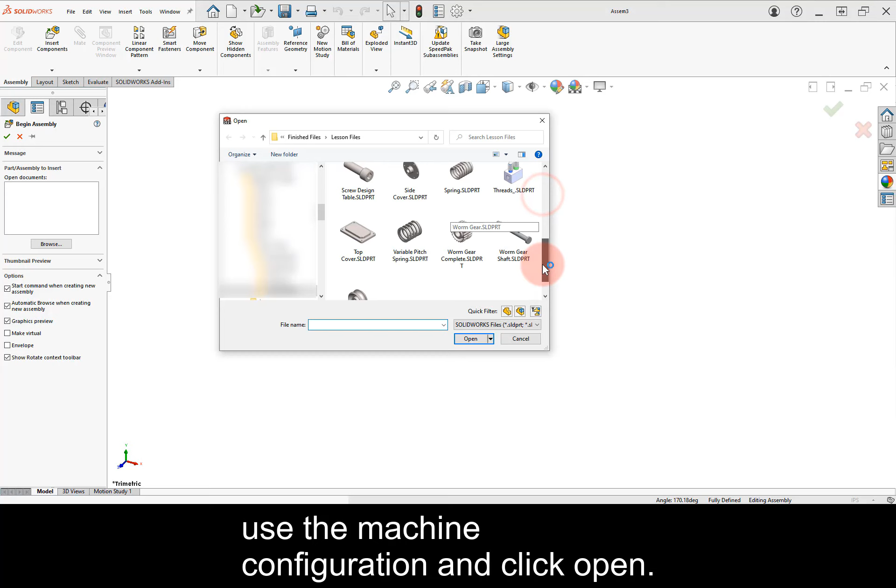Click on New Document, select the Assembly template and click OK. In the Open dialog, select the housing part, use the machined configuration and click Open.

Click on Hide Show and make the origins visible. Locate the housing at the origin and hide the origins to continue.

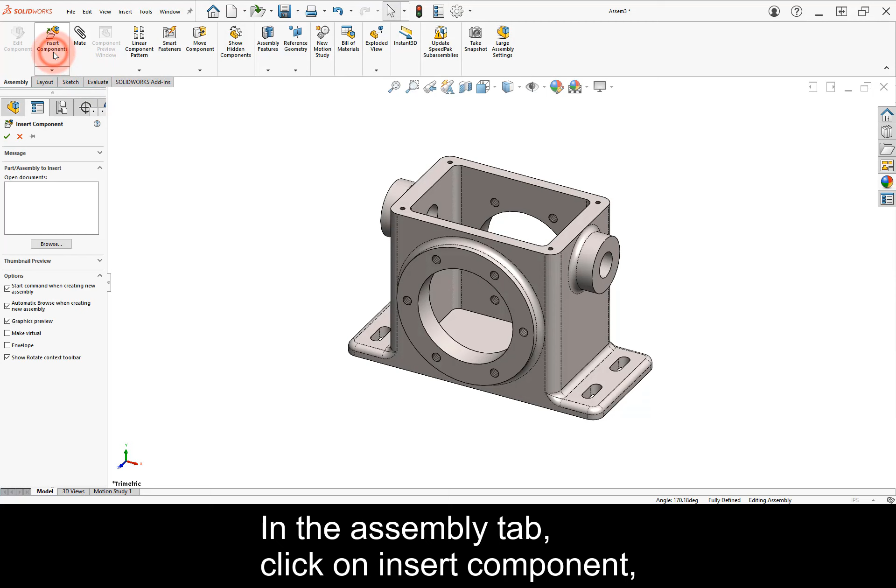In the Assembly tab, click on Insert Component, select the side cover, use the machined configuration and open it. Click in the screen to add the side cover to the assembly. Click and drag to locate it if needed.

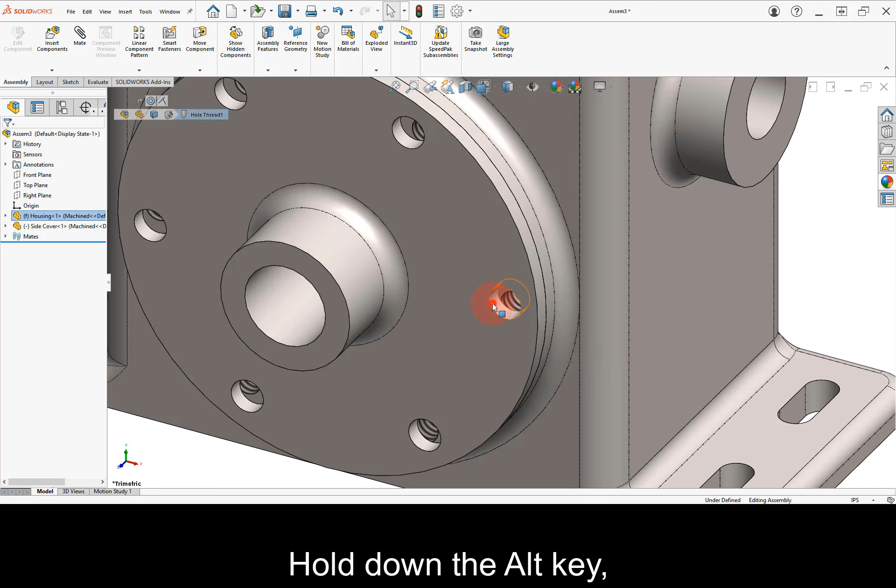Hold down the Alt key, click and drag the edge onto the housing's edge. Hold down the Alt key, click and drag the hole's face onto the housing's hole.

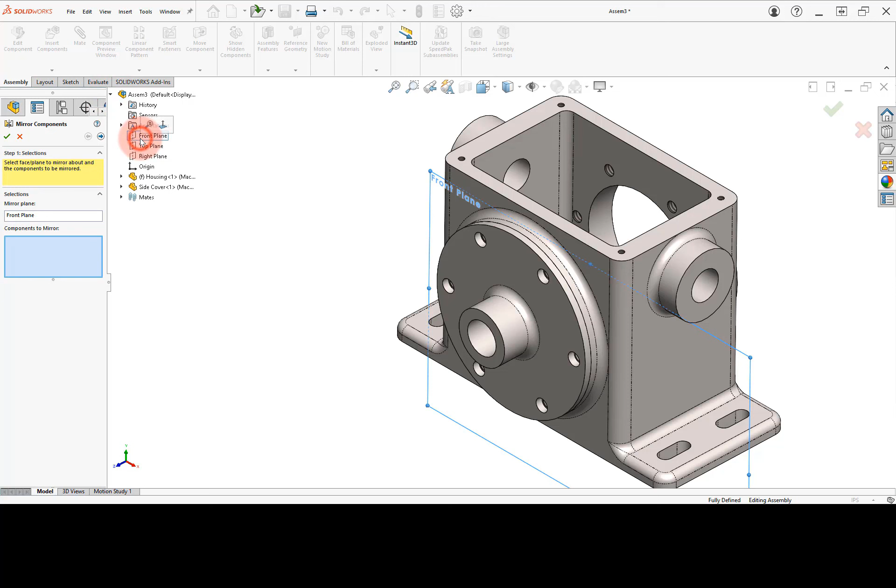From the Component Pattern drop-down command, select Mirror Components. Select the front plane and the side cover. Click Next to preview and click OK to finish.

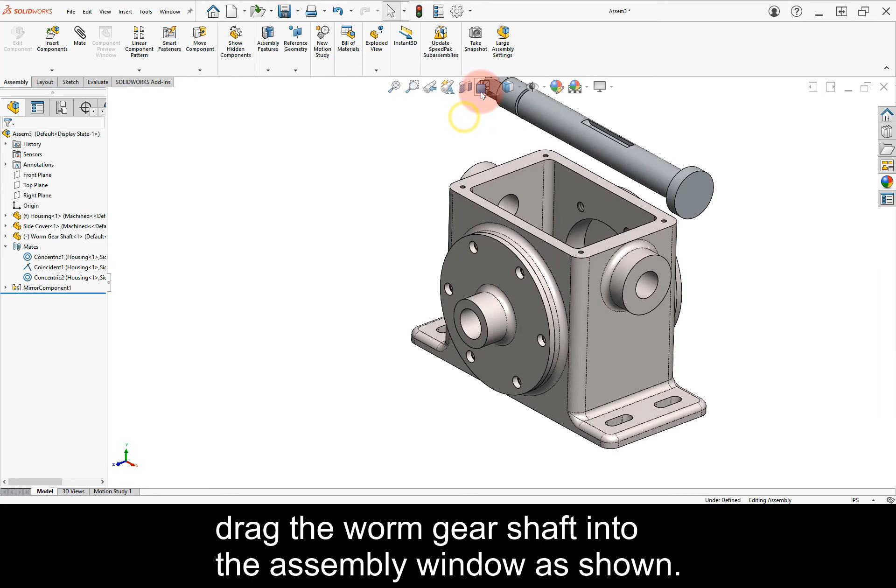From a Windows Explorer window, drag the worm gear shaft into the assembly window as shown. Right-click on the shaft, select Move with Triad and locate it as indicated.

Hold down the Alt key and drag the edge indicated onto the side cover.

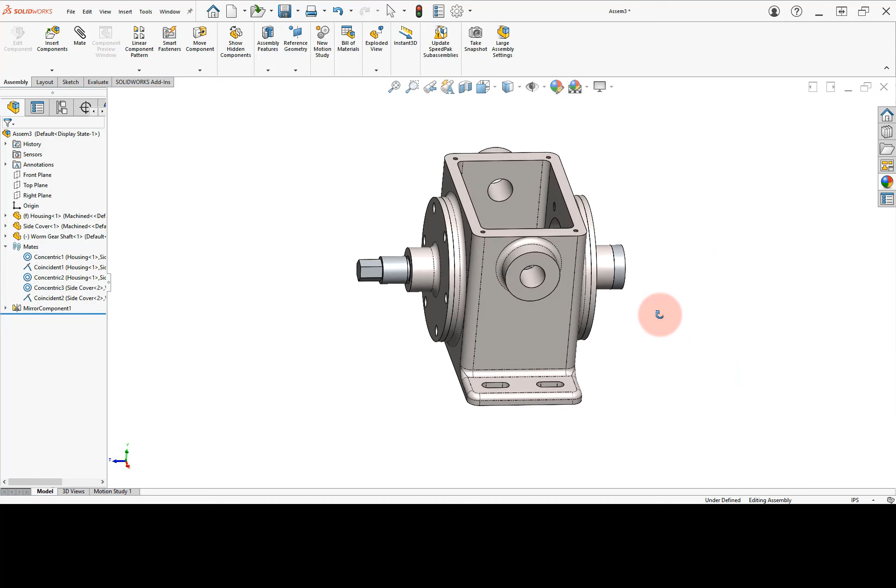Select the Open command, open the Worm Gear Complete part, and select the menu Window, Tile Vertically.

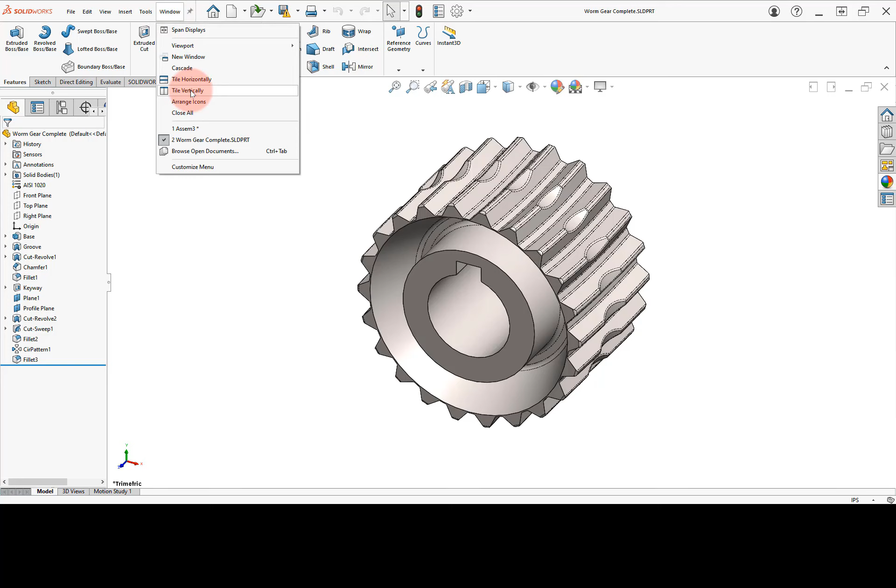Drag the inside face of the worm gear into the assembly window and drop it on the worm gear shaft. Confirm the concentric mate and click OK. Maximize the assembly window.

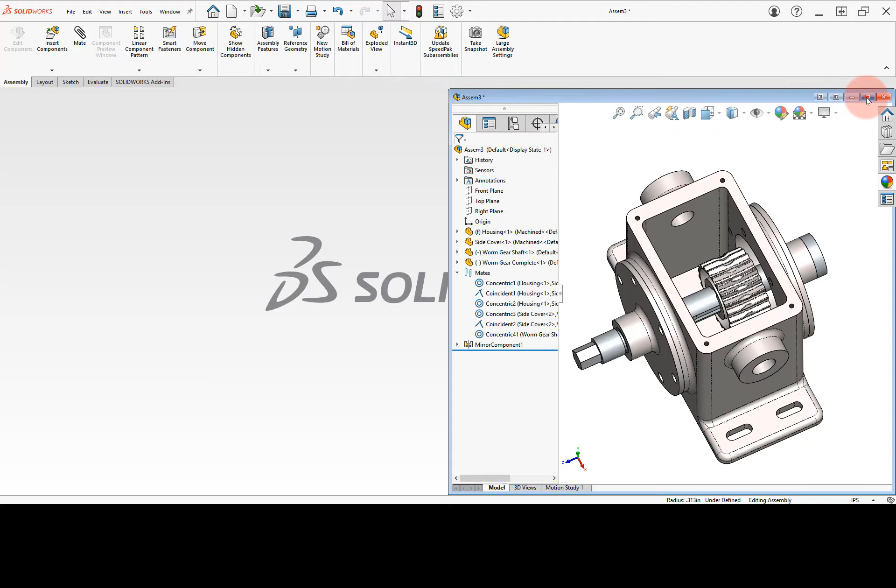Select the Mate command, expand the Advanced Mates, and select the Width Mate. Select the inside faces of the housing, activate the tab selection box, and select the gear faces.

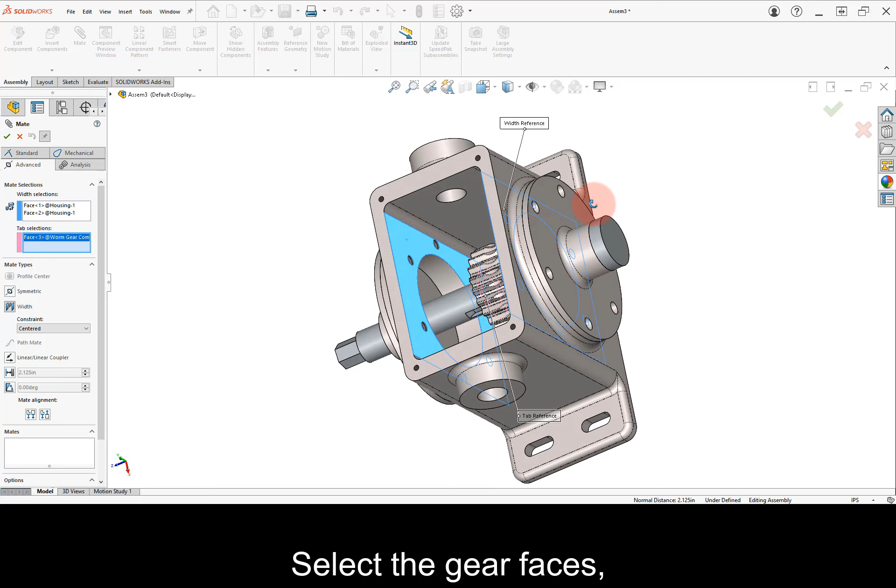Click OK, then close the Mates command.

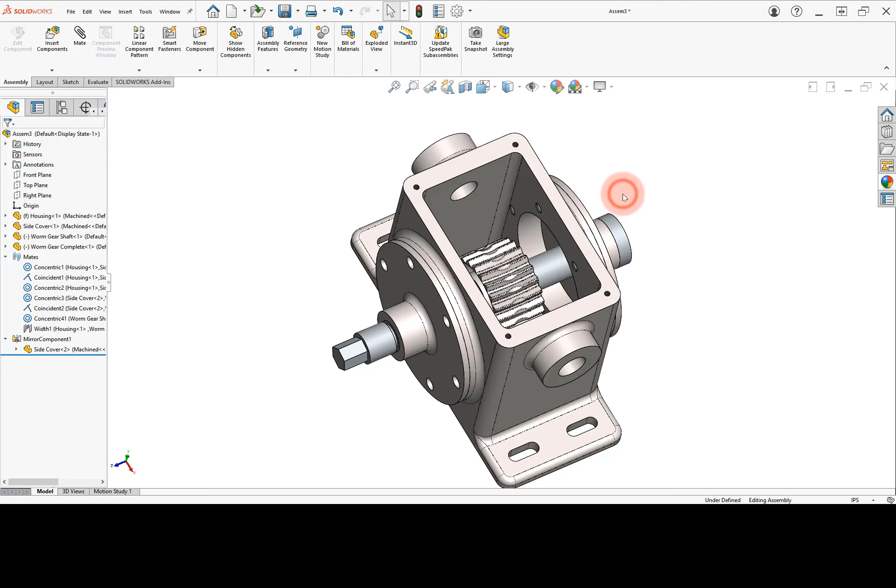Click on the housing and select Hide Component from the context toolbar. Move the shaft and gear. Select the two faces and add a parallel mate.

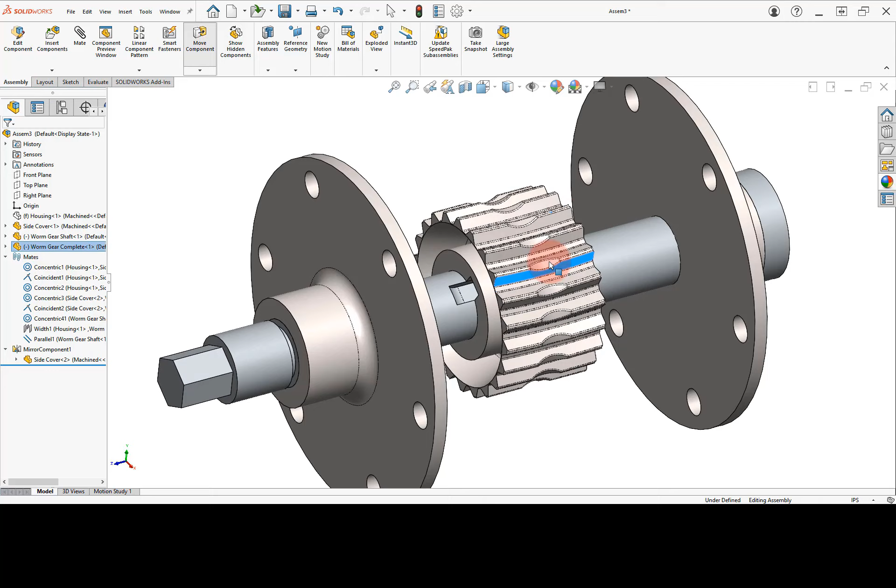Click on the housing in the Feature Manager and select Show Component. Use Insert Component to add the offset shaft gear and locate it above the housing.

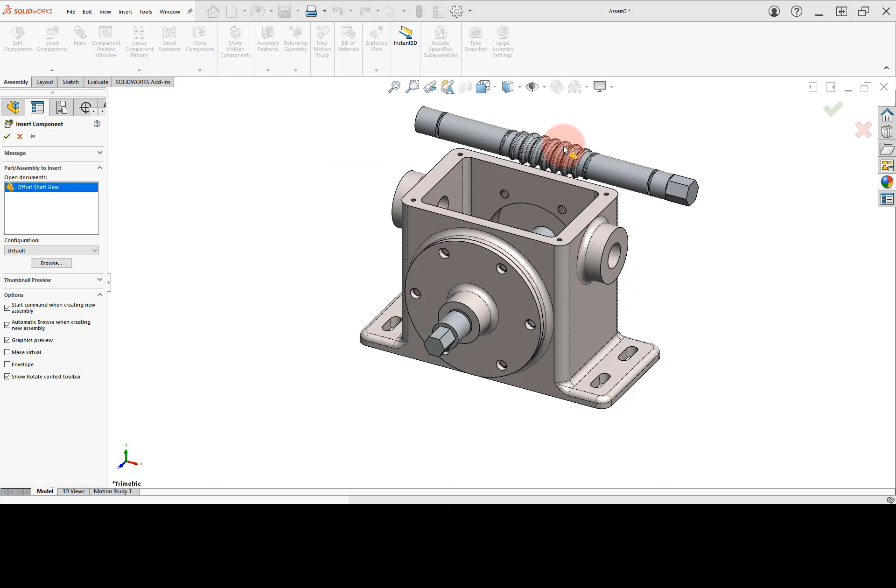Hold down the Alt key and drag the edge onto the hole indicated. While holding the mouse, release the Alt key and press the Tab key to reverse the direction. Release the mouse at the correct direction.

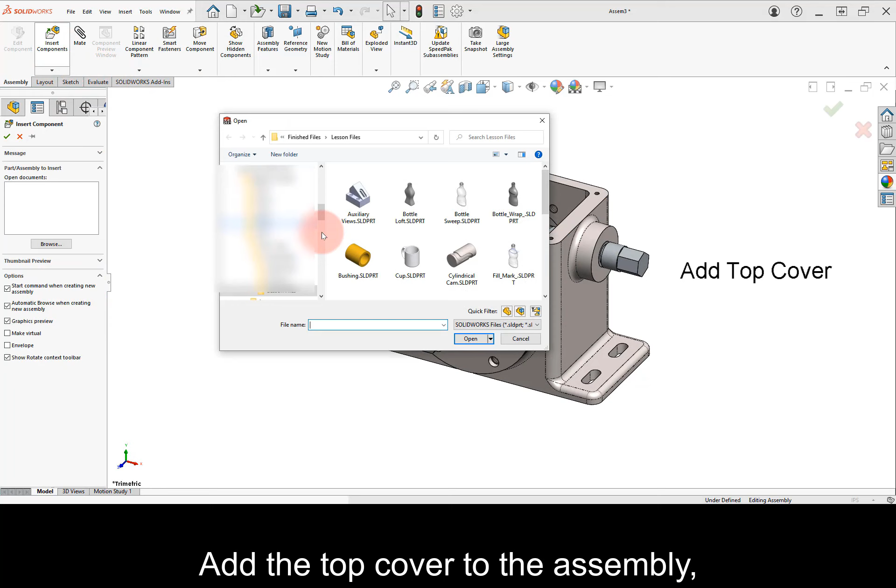Add the top cover to the assembly. Right-click and select Move with Triad. Move and rotate as indicated.

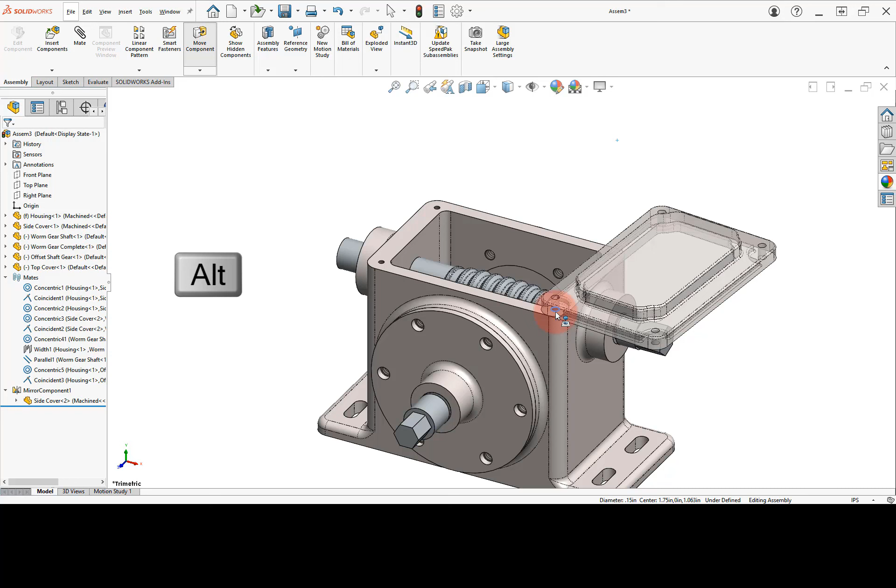Hold down the Alt key and drag the cover's edge to the housing edge. Release the Alt key and press Tab to flip the mate. Release the mouse with the correct orientation.

Hold down Alt and drag the selected face. After releasing it, add a parallel mate.

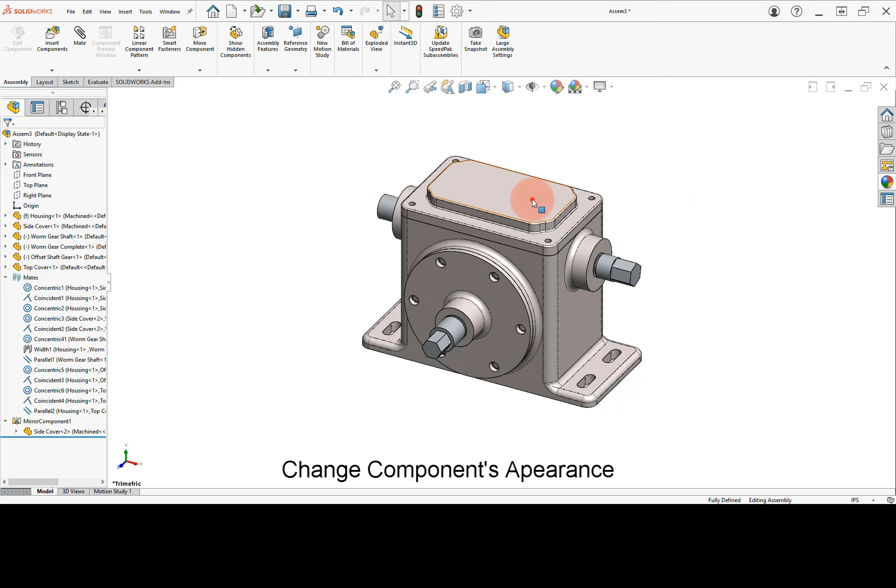Select the top cover and change its color. Click on Keep Visible and change the rest of the component's color. Cancel the color command to finish.